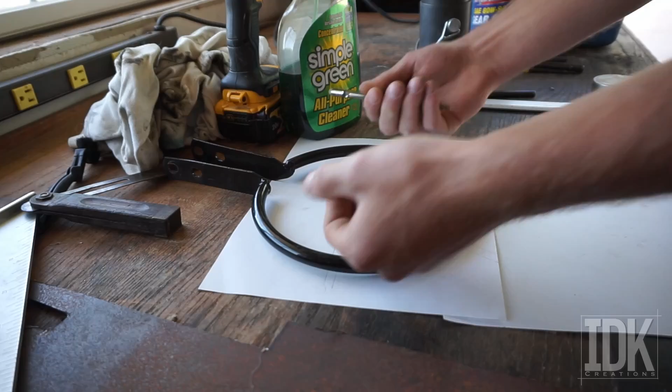Alright, so this is my first sketch for the steering wheel. I really like the look, and I do like this flat line, but since it's only the underside of a wheel, it'll be good for turning one way with one hand but not the other, because most of the time in this cart you'll have one hand here and one hand on the lever. So these are going to have to move up a certain amount to make it work for turning. I do like that it favors the bottom side more than the top, so I'm going to cut these out and see where I feel like it fits.

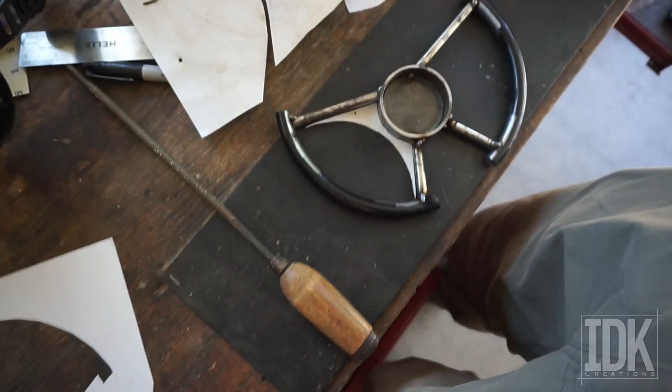Okay, so I got the steering wheel all welded up. It's good enough looking for me, and I'm going to slap some black paint on it, mainly so it doesn't rust right now. I'll still have to drill the holes once I get the parts this mounts to, but I'm really happy with it. I think you'll be able to turn all the way 180 this way, and then push on the end to get the 180 the other way. So I think it'll be pretty good.

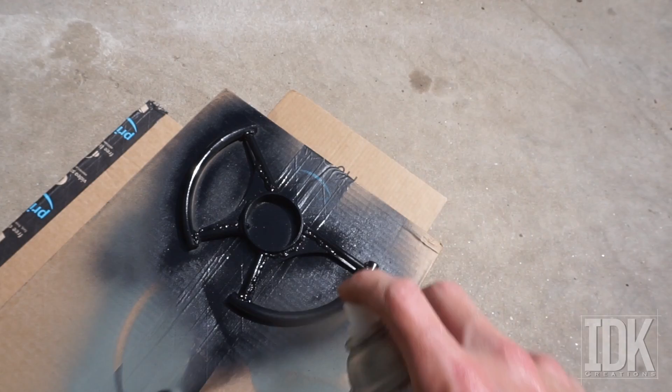It came in the mail, let's open it up.

Yes! But as far as me actually fitting in it now, it's a bit tight. But I think it'll look cool once it's done.

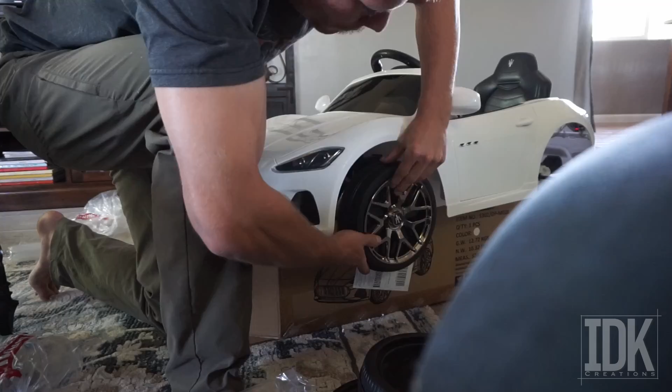Oh, will the seat flex? See everything just compressing. Are you waiting for it?

Yeah buddy, okay so my feet don't fit in the car, we're gonna have to make some adjustments later. But in order to drive it, there's a remote control for the parents of the kids. Who needs pedals, bro? Who needs pedals? I am a speed demon. This is full turn.

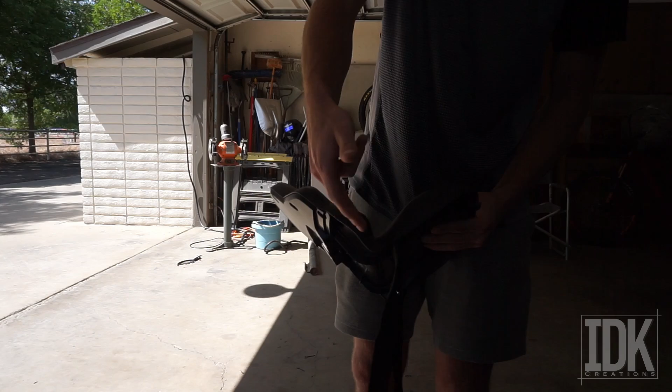Alright, I'm going to see if I can reuse this tiny seat that the Power Wheels came with, but obviously not as a full seat because I don't think that'd work out. I'm going to cut it right here, notch a little notch out, and then see if with some heat I can get it to straighten out so it can be the back of my seat.

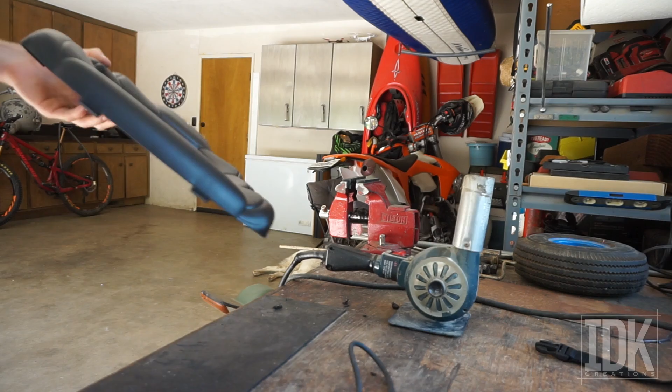With the soldering iron, I smoothed this all out, just ran it over the surface, and then I went ahead and sanded it. It does turn this light color, but I'm pretty sure if I hit it with the heat gun that'll go away, so let's try that out.

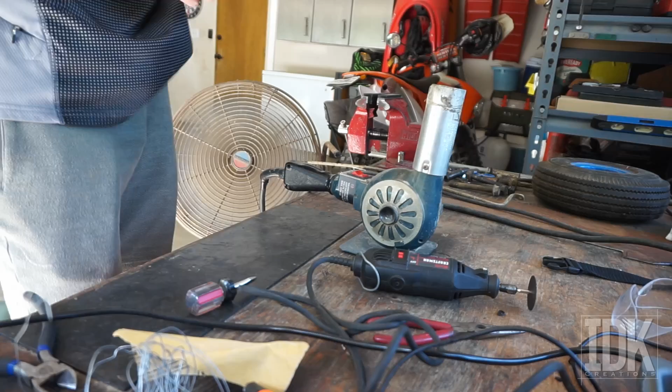Okay, it kind of started to go away. It's definitely better, but I think a torch will work better for this. So, always fun to play with fire.

Alright, brought that color back, a good dark black, but I do think I need to do a little more work because now that's a lot more visible. So I'm going to work on it for a bit, and I'll show you when I'm done. Alright, that looks pretty good to me, especially since it'll be kind of down in the car, who cares. I ended up putting some texture on it by heating it up and pressing this little nylon cord against it.

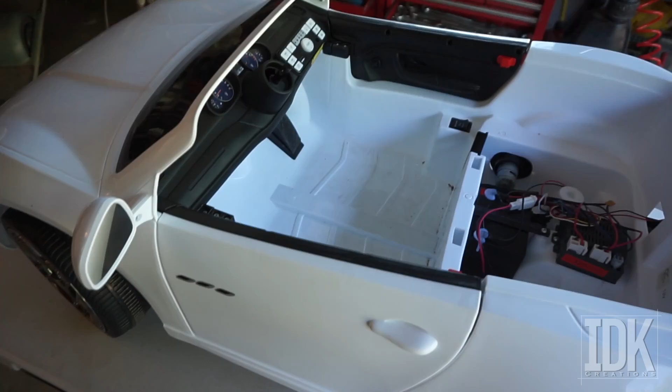Okay, this morning I'm going to start on cutting away the entire floor of this thing. Don't need any of it. I might keep just this center section for the structural stability of this plastic car, but all this is going to get removed.

I'm going to cut as much away from this so I have room for my hips. And then it'll get cut all the way back to the back with maybe a quarter inch here at the back for structural stability. But I'm trying to push that seat as far back as I can. I'm going to cut out this entire floorboard, and this entire dash is getting removed so my feet can go all the way to the front.

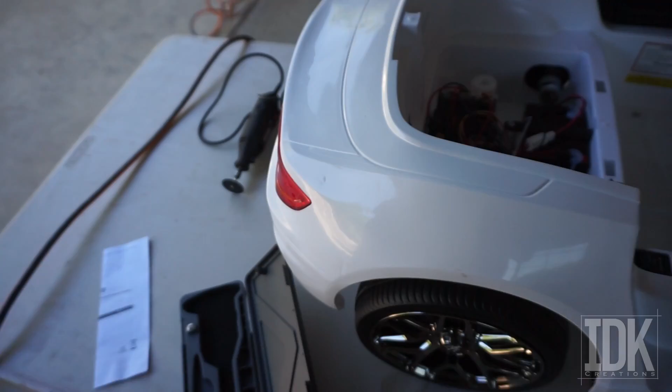To mark the lines for the back of this thing, I took my caliper, opened it up to the size I wanted, and then I scratched in a line. It's kind of hard to see, but you can kind of see it in the light there, all the way around, so that it's the same thickness edge.

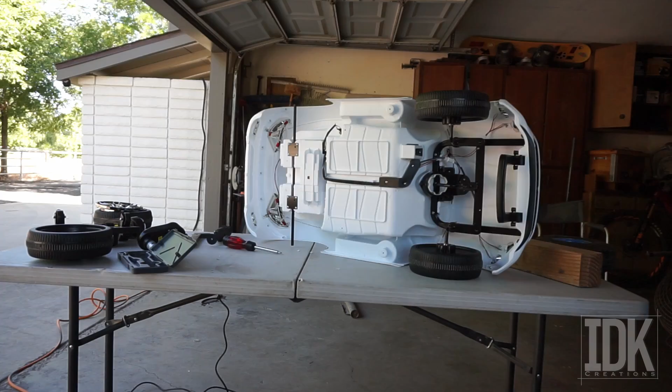Got this cut away. The floor part is quite sturdy-ish for plastic. The back part's pretty wobbly, but there'll be metal going between all this, so not too worried about that. Gives me a lot more room to sit back here.

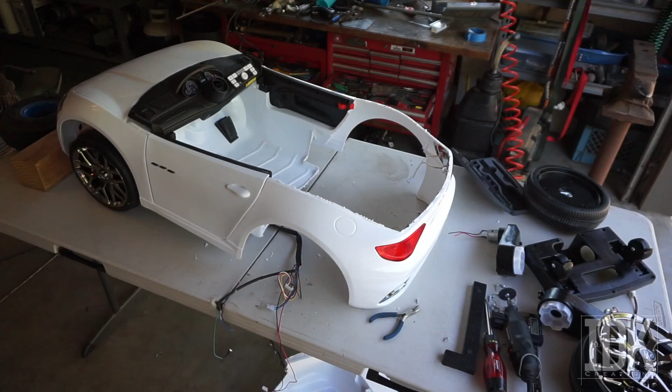So now I'm going to move on to cutting the front part out and removing this dash and everything. And I am not going to film that because this camera needs to charge, but I'll show you when I'm done. Alright, I got it all cut out. Looking good, much more stable than I anticipated, so that's good.

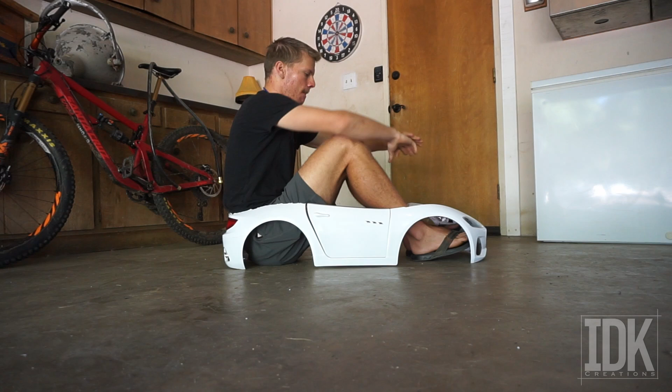Let's see if I fit in it. I lean the seat back. Steering wheel's up here. Yeah, maybe a little bit of clearance right here so that my shins aren't hitting this so bad. I might have to extend it back a little bit. Not gonna lie, because while I do fit in here like this, if I put a seat here that moves me forward like this, that's pretty tight. I'll have to think about it.

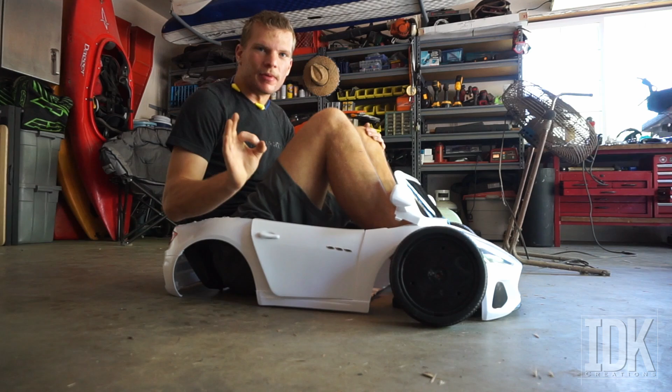Alright, so I've done some thinking, and I think I need a little bit more room. Now, I don't want to go backwards because I don't want to cut this body up and make it look all funky in the back, because it would be really hard to recreate these curves and things for an extension. So instead, I'm going to take the windshield and move it forward about 2 inches. That'll give my legs a bit more room to go to the front of this car. And then, this is actually pretty comfortable with the seat in the back and everything. It's not bad. I also set the tires here

because they're gonna be sitting on the outside like this, because this car is gonna get a wide body. It's gonna look like a wide bodied car because the caster wheels in the back are gonna have to stick out far enough that they don't hit me, and I have big caster wheels coming, so they're already gonna be sticking out. So if I make the front wheels stick out and give it a wide body kit, it'll look good.

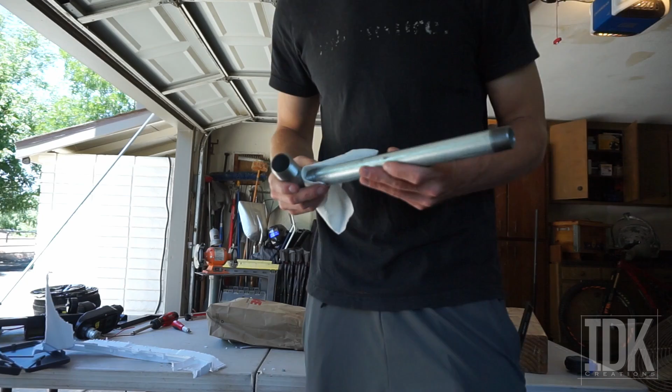Okay, so I just went to the store and I got this. This is going to be my axle. If I had a full go-kart going on with an engine and everything, I wouldn't use a pipe for an axle, I'd use something solid like a regular axle should be. But the axle is probably gonna be about this long, and it's really not taking that much abuse, so I'm not super worried about this. Plus it's an inch thick, or an inch wide diameter, and it's a pretty thick tube, so I'm not too worried about that. And then I also got this pipe that will pressure fit onto this, I promise.

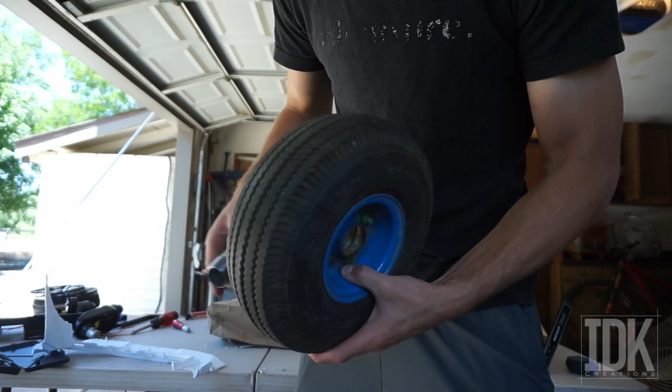Pressure fits down onto that, and it'll be the center of my wheel. Let me go grab that. So this is just a go-kart wheel we had laying around, and the center had bearings in it, but obviously you don't want bearings to put it onto an axle, so I'm going to take this tube, which is pretty dang close in size, and I'm going to weld it in there, and then that will keep it on the axle.

Alright, got my sleeve here. Now I'm going to drill a hole in it right here and tap it, so then I can put this screw on there so that once it goes onto that shaft, tighten the screw down and it'll lock it in place.

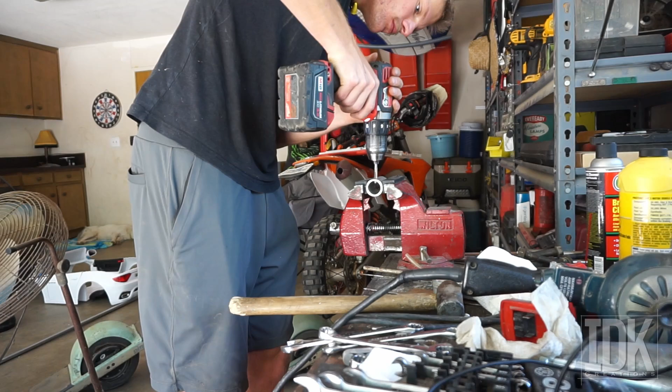Alright, there you go. I'm also going to weld this nut on there because I think just tapping through this isn't enough threads to keep the screw in there. I don't want it falling out while I'm riding, especially since this is going to be spinning a whole lot.

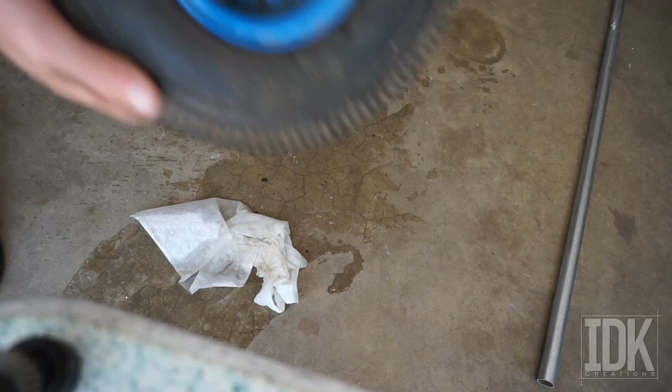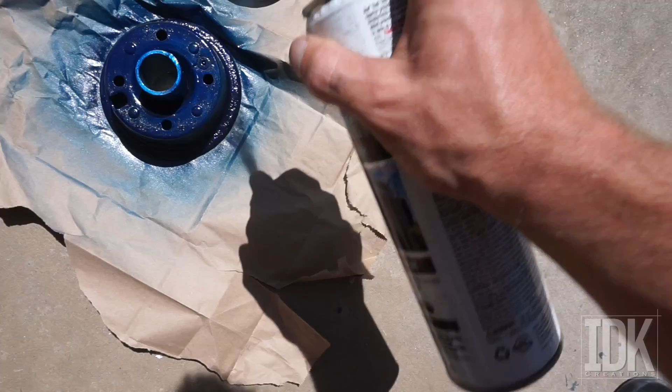So here I'm putting sand down into the tube using a funnel. The reason I'm doing this is so I can pack the sand really tightly into the tube, and then when I go to bend the tube, it won't fold or crush under its own weight, theoretically. I've never tried this before, so let's see how it goes.

Now there was a method that I was going to try for this, so you'll hear me talking about wire in this next clip. I ended up not putting that in the video for time's sake, so let's move on.

Okay, so I was just down here looking to see if we had wire over here. You can't see any of that, but there was wire over here, not really good for what we were doing, so I started looking at other options. And this part of our trailer, I can stick the pipe into like this and then bend it, and bend it, and bend it. I was like, oh, this might work.

So I tested it out, and I don't know if you can see, but there is a slight bend in this tube, so I can just keep working it and keep working it. It's gonna give these little dimples on the back a little bit, but you won't be able to see the back side, and the front side's looking really good. So as long as it doesn't crush and I move enough, I think this will work. I'm gonna give it a go.

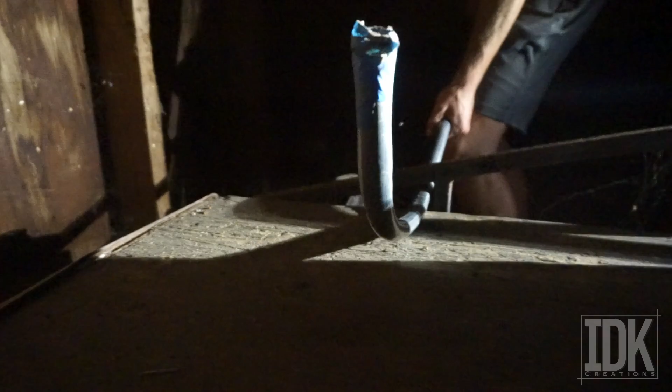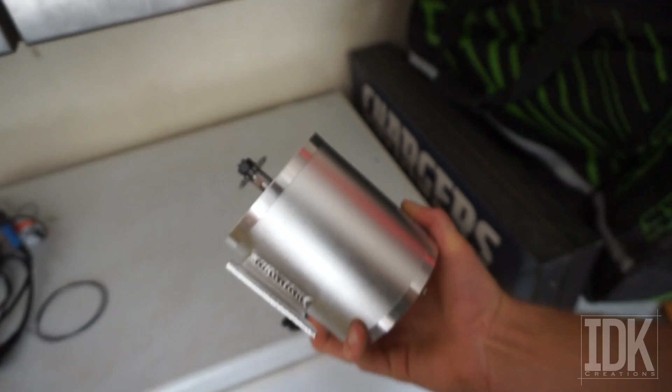So I just got all the electronics in the kit, and this is the motor I'm going to be putting in there. I just thought, man, this thing's beefy. Hopefully this thing makes us rip. Also, I just thought about this — I wonder what it is compared to the original motors in the Power Wheels. Just slight upgrades.

Alright, it's all wired up. First test. Let's see, we got ignition on, one. That's one, two.

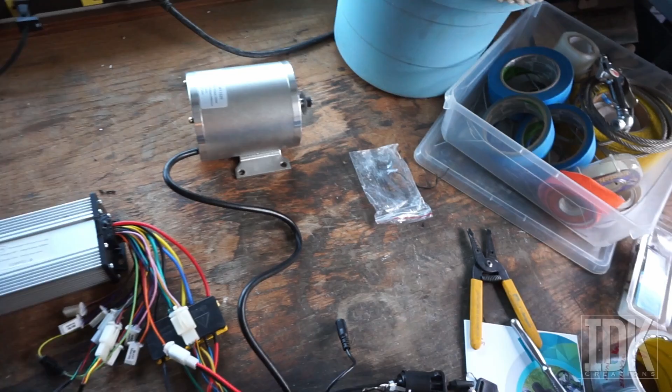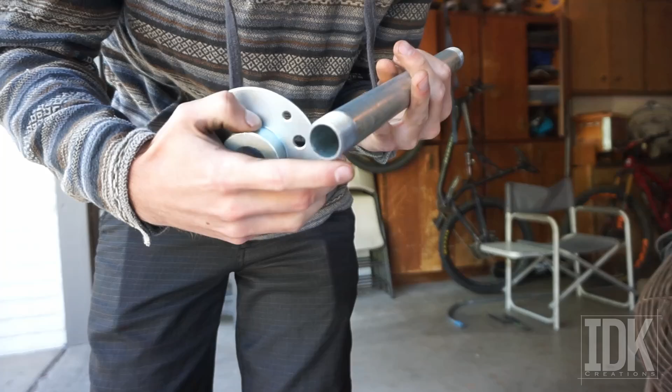Going pretty good. Okay, so this pipe that I was going to use for the axle is not going to work because while the end measures as 1 inch and this other tube fits over it, when I actually got the 1 inch parts or 1 inch axle, they only slightly go onto the threads. On pipes like this, I forgot about this, the threads start smaller and get bigger so that they lock up better once you put them on there. So this actually measures 0.05 over an inch, which is considerably too much for this to slide down over there.

So instead, I picked up this tube. It's actually 1 inch. It'll have to get hammered on there, but this is going to be my axle. Again, it's tubing and it's even thinner than the other stuff, but I'm really not that worried about it because the axle's only going to be like this long. I don't think you can bend this with all the weight that this cart has and all my weight. I just doubt that this will ever bend or crumple. I'll probably weld washers on the end to give it some strength and stuff.

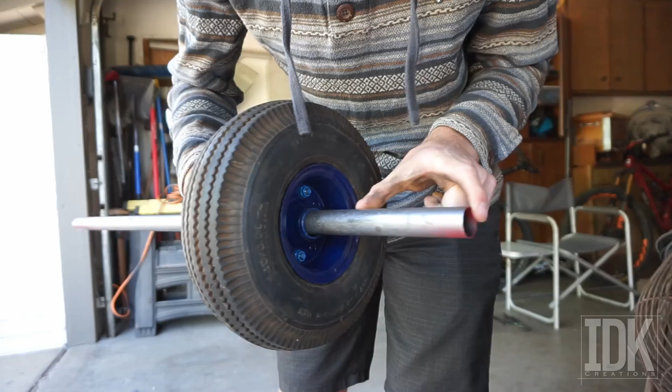So, but now this tire is super loose on this axle, which we can't have. So I'm going to cut a chunk of this out that's the same width as the sleeve that I put in there, and I'm going to cut a slot down the side of it, bend it open, put it around this, and then sand it down to whatever it needs to be to fit inside there as a collar to keep that super tight, because it's got quite a bit of gap in there. So let's do that.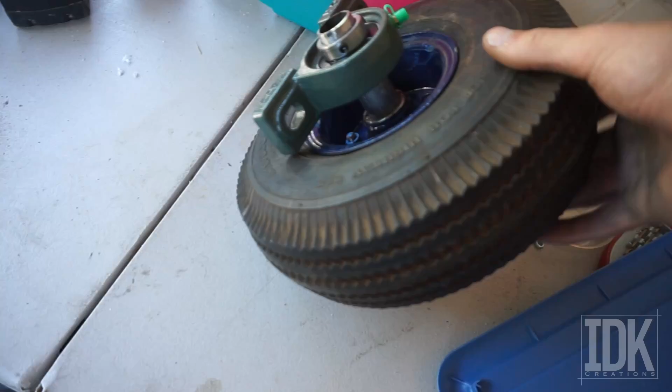Alright, I got my axle assembly all assembled here. So boom, nice and tightened up there. Got the bearings on either end, and then the gear mount here.

Alright, I just used the Dremel to cut out these little notches because I bought this separate from the kit with the motor and all that stuff, and this came with the motor kit. Those holes, these big ones, were close but not quite it, so I just Dremeled it out so that they fit right there. And yeah, this online listing didn't have measurements for the hole distances, so I didn't look too hard for anything specific. Figured I'd have to modify it either way, so I didn't want to wait. So this is impatience is what this is.

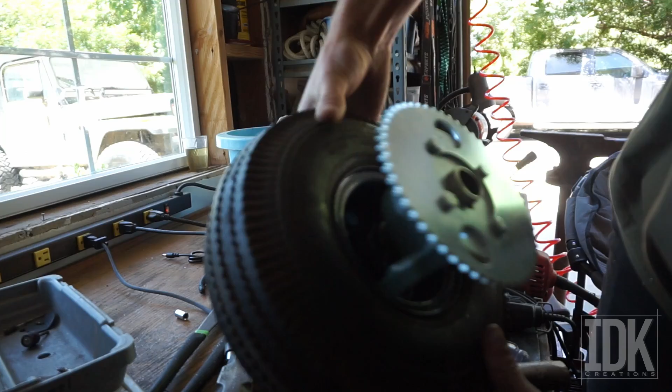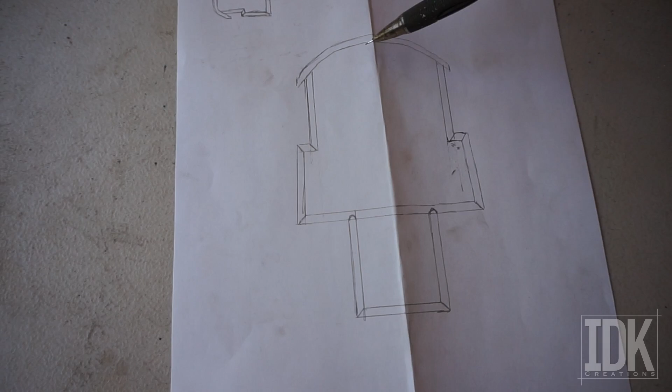For those of you wondering why I haven't connected this line together for structural stability, the front wheel will be in this area, so we can't really get away with that. I might have to end up putting some gusseting into here, but it'll also all be supported by towers that come up right here for the steering part to hold the front wheel and everything, so I think we'll be plenty fine like that.

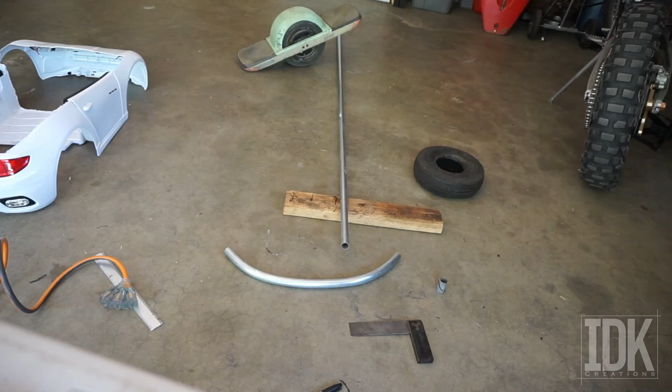So I ended up using galvanized tubing for the frame of this thing because it's cheap and readily available, but galvanized tubing, when you weld on it and it heats up, you get a very poisonous gas. So you can see in this clip, I sanded all of the coating off of at least the outside of the tubes and as much of the inside as I could. And then I had a fan next to me the whole time and I held my breath while welding, and I didn't have any problems with it so far. So let's hope I don't get lung cancer or something, but that's why I did it. I don't recommend it, but that's what I did.

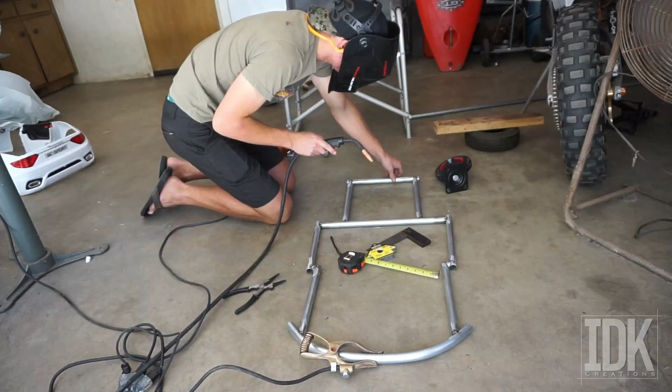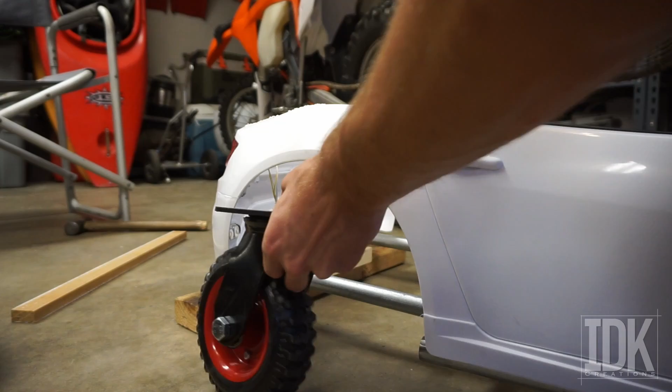Okay, so I've been looking at this for a little while, pondering, and I'm working on the system for the caster wheels to go in place here, and then pivot, so that you have straight mode and drift mode.

My thoughts: I'm going to use my old shackles, my stock shackles from my Jeep, and the sleeves that were inside the rubber. So these are gonna be my pivot points, it's gonna pivot right on here.

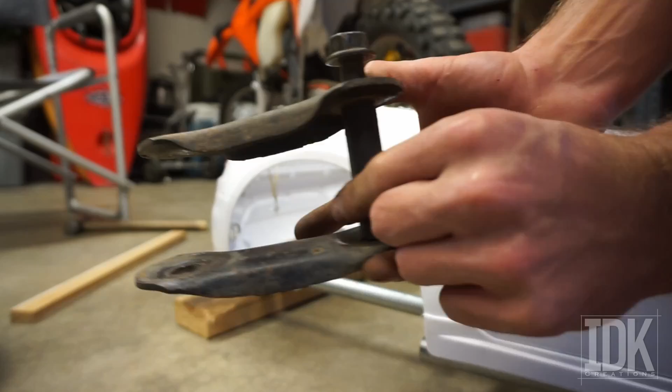We're gonna have a handle with a bar that comes back here, so that bar will be moving like this. This is gonna go over the plastic here. It's gonna be moving like this.

We're going to have one of the rods coming through here, straight through, which is gonna weld to the outside of here. So then that can go like this.

And then for the pivot point for this to pivot on, I'm gonna cut the ends off of another one of these, weld it just below that, and have another boom pivot point that will be welded to the frame with some bracketry and stuff. And so this whole thing will pivot like this.

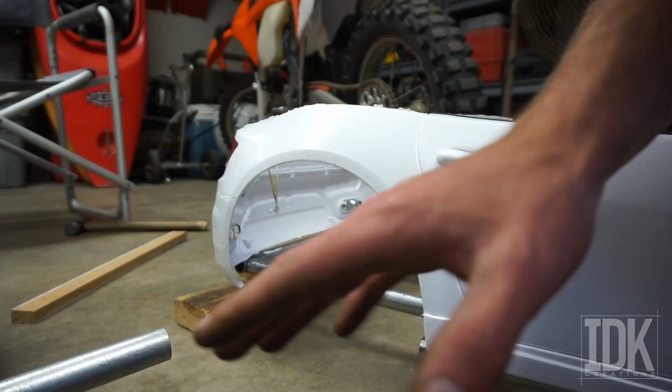It's a lot to do. And if it doesn't make sense, whatever, you're gonna see me do it.

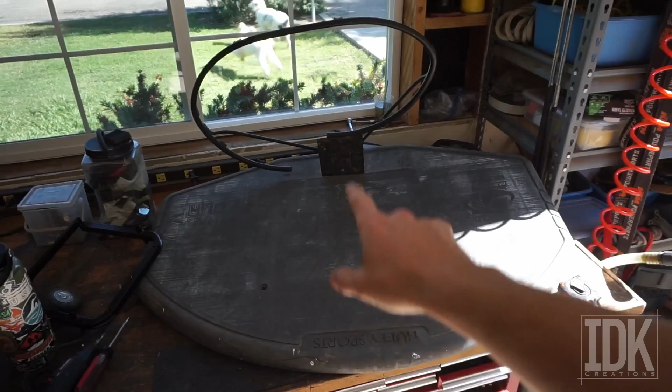Alright, this is a basketball hoop and backstop that I liberated from the side of the road. Don't worry about it. But it's going to be the plastic I use for the bottom of the seat. Oh, and I'm going to reuse this metal - these bars are going to end up being the supporting beams for the seat.

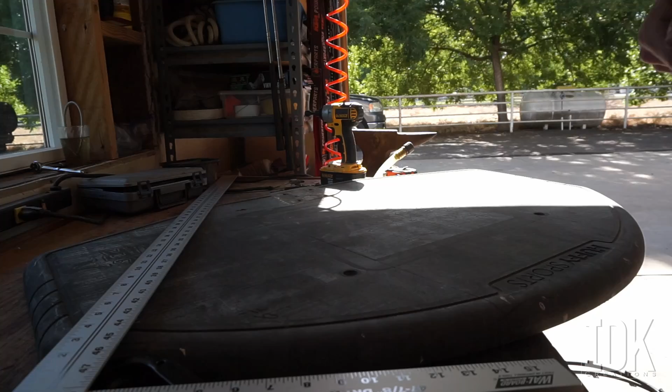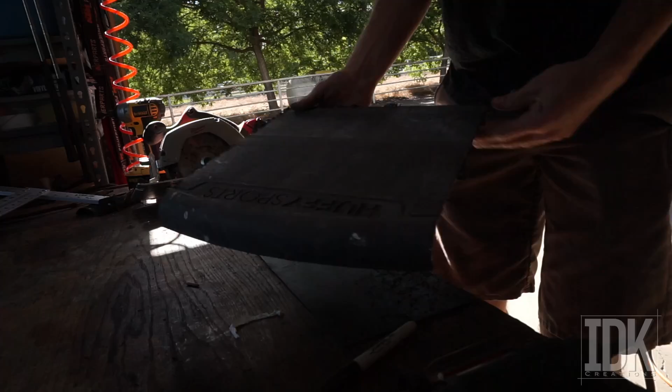I'm going to use this part from the Power Wheels, the original Power Wheels, and it's going to be my frame that'll get embedded down into that. Now for the supporting structure on the back of the seat, I'm going to be using the seat part of this old motorcycle frame in our barn. So I'm going to be cutting it probably right about here.

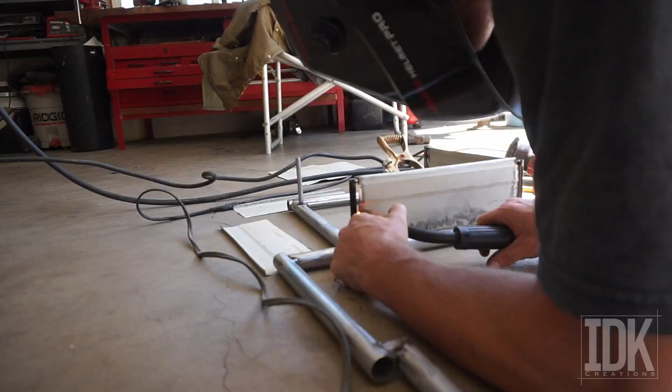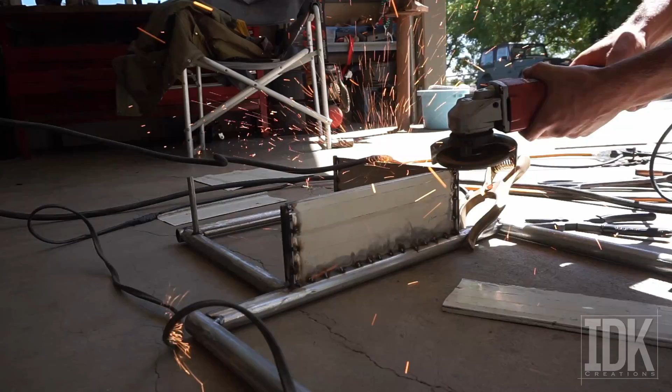Alright, there's the seat box where all the electronics will go - battery, the speed controller, and all the wires. Everything will come out from there. Probably put the key somewhere here too. But yeah, I think it turned out pretty good. I plan on sealing it up with some silicone or some caulking or something that's paintable, and then hopefully it won't get a bunch of dirt in it.

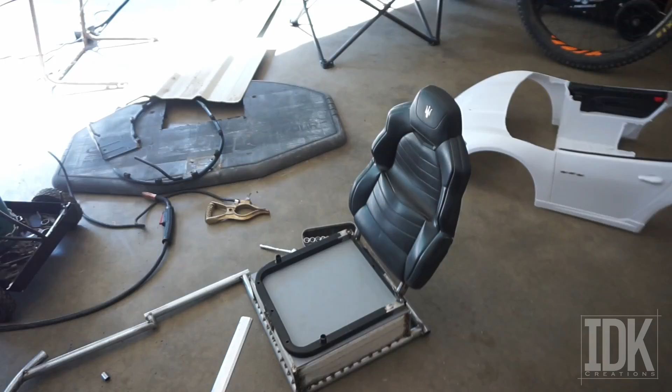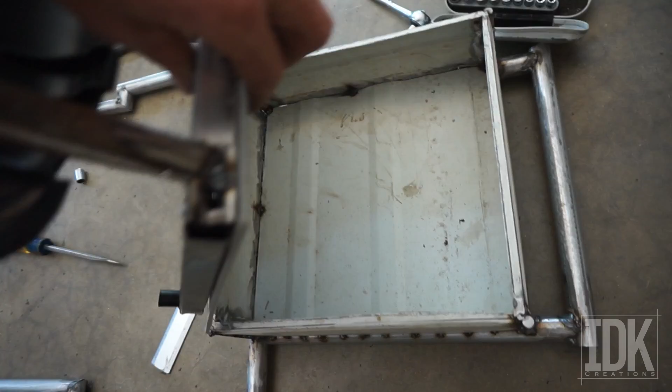Alright, so we got the box with the seat on it, and the seat has a hinge put on it now, so you can hinge it up and get into the back. There's this piece of plastic here, which I will attach to here, and then boom, you'll be able to access your electronics. I'll seal this box up and put a rubber seal all the way on the outside, and then boom, seals up. You can just get in it.

I was thinking about maybe putting a latch on this side, but honestly you're sitting on it, so it's not like it's gonna come up. So I don't know, I might put a latch, but for now I'm not going to. But yeah, it's pretty dope.

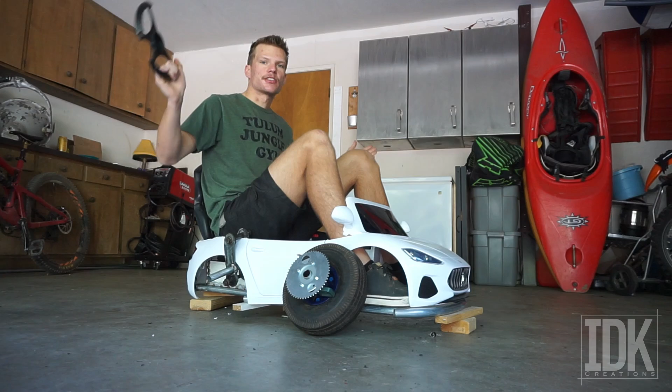Okay, unfortunately, this is all I have time for in this video. In the next video, I hope to get the bracketry done for the handle and the caster wheels. Hopefully I can get the steering column done and the mount for the motors and all that stuff. And hopefully in the next video I can do the first test drive.